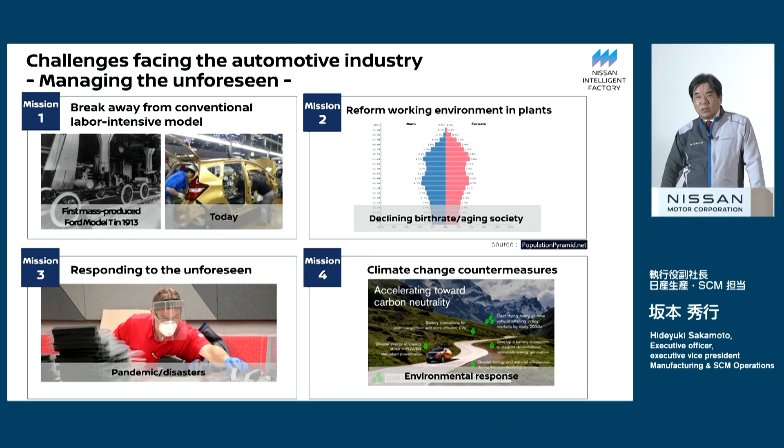Next page, please. We need to build our car production scheme for the next generation, which is adapted to the future: electrification, vehicle intelligence, and connectivity.

Building cars is growing more complex and advanced. We are writing a lot of software all at the same time, doing calibration of different sensors and self-diagnosis, fail-safe systems. These are the assurances that we are doing. So car building is becoming even more complex and challenging.

If you look at battery, big battery with long autonomy and standard battery, and vehicle intelligence, and hands-off sophisticated autonomous driving technologies or standard driver assist technology like ADAS, there are different combinations of variations which are required to build cars.

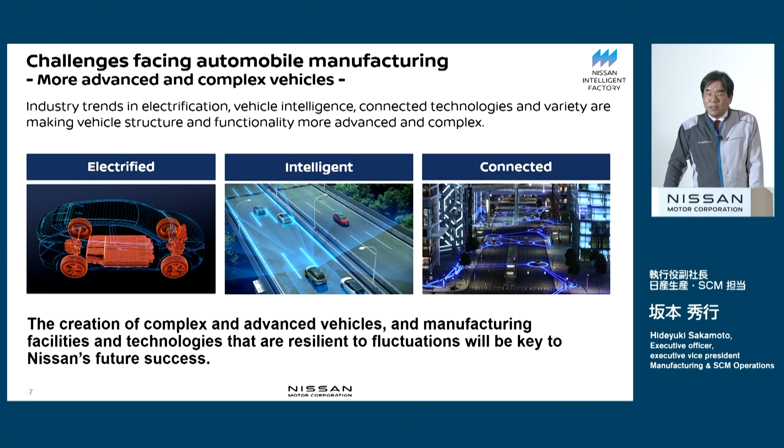So in order to build more advanced and complex vehicles, we need to make the production scheme and production engineering more flexible. And this will be the key success factor for Nissan in the future.

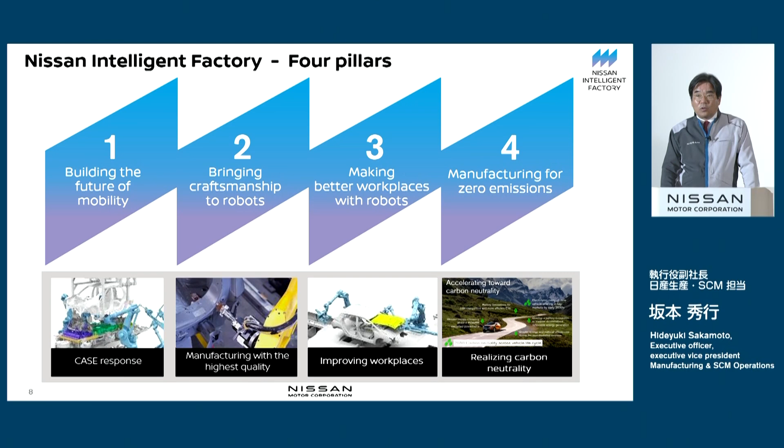That is why we have been creating this Nissan Intelligent Factory. These are the four pillars. Today, I will show you around the shop floor to provide you with the details. Next page, please.

In the introduction, carbon neutrality initiatives, what I would like to touch upon, which I had less opportunities to talk about in the past. And then we'll talk about the technological elements of Nissan Intelligent Factory, and Kikuchi-san will talk about the overview of the plant itself. Next page, please.

Carbon neutrality. Next page, please. Well, this is self-explanatory. Around the world, we are seeing global trends related to climate change. Many agreements and declarations are made. Japanese government too declared to hit carbon neutrality by 2050.

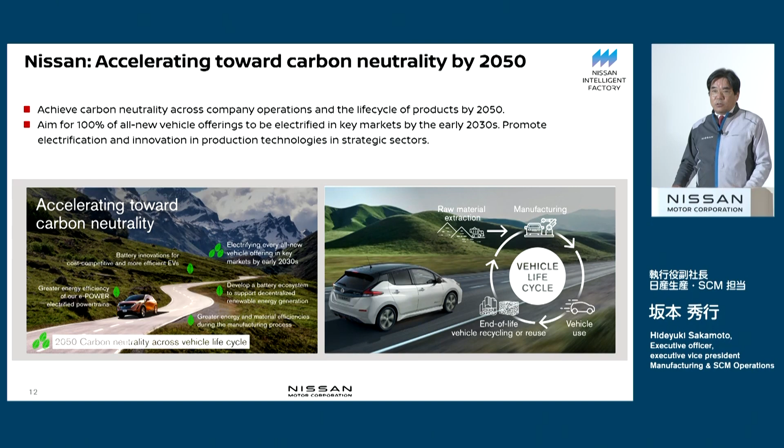And a lot of countermeasures are taken towards the goal. And we, Nissan Motor, declared to achieve carbon neutrality across company operations and lifecycle of products by 2050, and electrify 100% of all new vehicle offerings in early 2030s in key markets, and promote electrification innovation in production technologies to attain carbon neutrality even in the process of car building.

Having said that, carbon neutrality initiatives is nothing new for us. We have been working on the Nissan Green Program to reduce CO2 emissions ahead of many people.

In this Nissan Green Program in 2010, more than 10 years ago, with the first generation mass-produced Nissan Leaf EV, the main market in the main category or main segment of the market, C segment hatchback mass-produced EV, was introduced and offered an EV that you can use every day. I was in charge of the engineering at the time as a division general manager.

Then we came up with e-Power. This is about providing electric driving to help penetrate electrification in the market. That was why we introduced e-Power.

And at the time, I was head of the engineering and was fully involved in the development of this piece of technology. In order to build these electrified vehicles, by minimizing the consumption of energy, we minimize the CO2 emission. That's what we have been doing. And going forward, we are going to promote innovations to do more on this front.

Nissan Green Program. This is about the CO2 emissions in manufacturing operations. How much have we reduced the CO2 emission? For long years, we have been working on this. This started from 2005 to 2019. In order to build one car, we reduced 30% of the CO2 emission. This is already a track record.

This is a result. And as of today, 70% of energy consumed is electricity, gas, fuel. Fuel is the light oil, and this accounts for 30%, which is 29% to be precise. And we are going to nullify this consumption at the end of the day, and that's the mission of the manufacturing team.

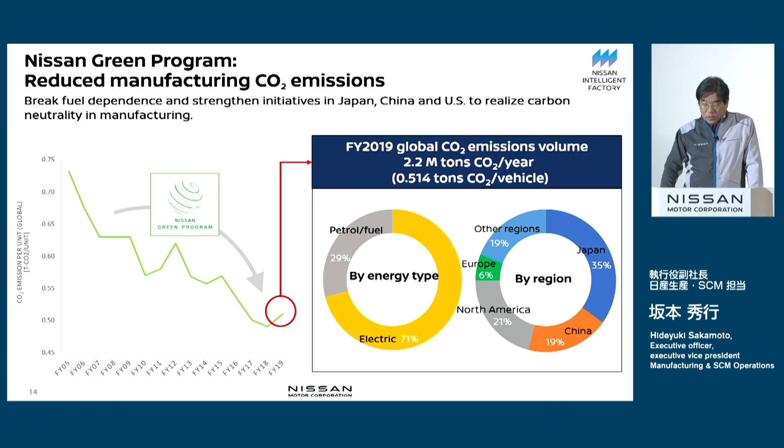Here you see how we are going to promote initiatives up till 2050, and this is a roadmap that we created. In 2019, as of today, which is approximately today, at the plant we have electricity at the plant. We use a compressor and using high pressure air, which is the blue line, and we provide high pressure air to the plant. And the gas, we use a boiler to evaporate it into steam. And this is how we operate the plant.

In 2030, what will happen?

We will largely reduce the energy consumption. And on top of this, within the campus, green energy, carbon neutral power generation, where we plan to use the fuel cell. We would like to generate power with fuel cell and use green energy, photovoltaic power generation, and windmills. We will combine the renewable energies and expand the scope of the trial.

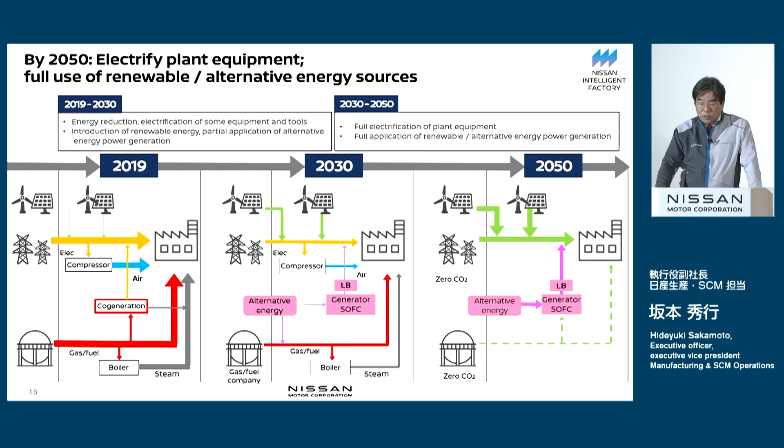Between 2030 and 2050, the basic production process or production equipment should be electrified, and the source of the energy will be shifted to renewable energy and clean energy power generation. That's our aim. Next page, please.

This is a specific example. It's pretty complex because the steel furnace, we do the casting. In this casting process, we use cokes in the furnace. We have to melt the steel and provide the nitrogen, carbon. So we need to electrify this furnace with the high frequency furnace. We need some technical development for this to happen, and the tools will be fully electrified.

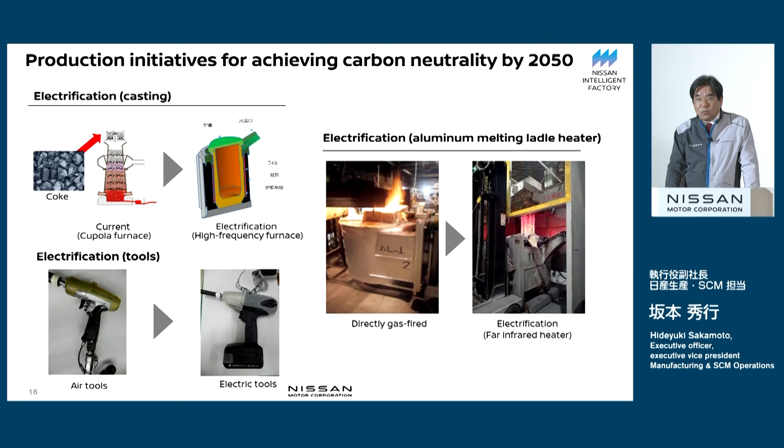Today we are driving the tools with air, and aluminum melting ladle heater will be electrified fully. These are the technological developments that are necessary. Earlier, I talked about how to electrify these equipment.

As you can see at the top, we shouldn't fully rely on external clean energy. So within the campus, we would like to generate the clean energy. To be specific, bioethanol will be used with the fuel cell battery SOFC, which is carbon neutral power generation. At Tochigi, we are going to do the trial, and at the end of the day, we will deploy it across the globe.

And as of today, in the UK Sunderland plant, we use wind power and solar power to generate a lot of electricity. And the other day, as we announced, a microgrid is created, and clean energy will be applied to a wide area.

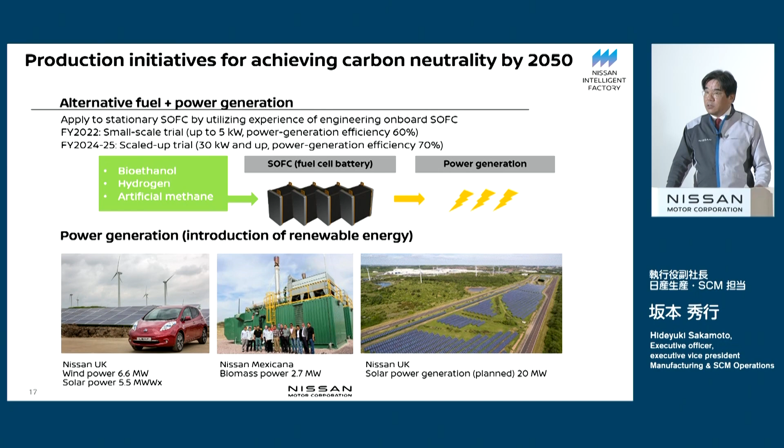This is a specific numerical objective of the concept. By 2030, 40% of the energy which is required to build cars will be reduced.

And in pink here, this is the carbon neutral power generation which is done within the campus, and this is the impact of the trial. This carbon neutral power generation and green energy procurement from the outside, and all the fully electrified energy will be used in 2050. And we will be fully carbon neutral. That's our intent.

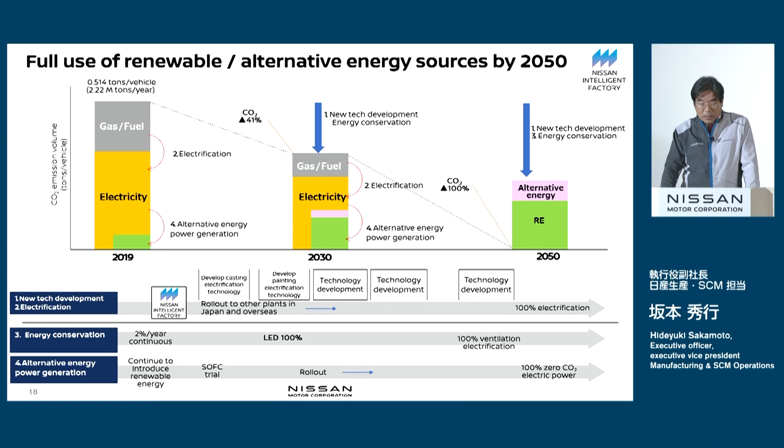Based on this detailed roadmap, R&D and production engineering teams are working to make it a reality. Moving on to the next one. That was all from me. I touched upon the carbon neutrality initiatives. Next is about the Nissan Intelligent Factory system components and the new technologies that are used, and CVP Hirata-san, in charge of this engineering, will be speaking. Thank you for your attention.

Good morning, ladies and gentlemen. I'm in charge of vehicle production engineering. My name is Hirata, nice to meet you. Let me take this opportunity to talk about how to build cars for the next generation with Nissan Intelligent Factory, and show you how the cars will change over time. Excuse me, let me take off my mask. And how the production line will be updated with new technologies.

I will specifically show you photos of the equipment used in this Nissan Intelligent Factory. On November 28th, 2019, Nissan Intelligent Factory Tochigi was used as a pilot, and we are going to deploy it globally, and that's what we announced. This Nissan Intelligent Factory in Tochigi will be producing the next generation battery EV, which is the Nissan Ariya.

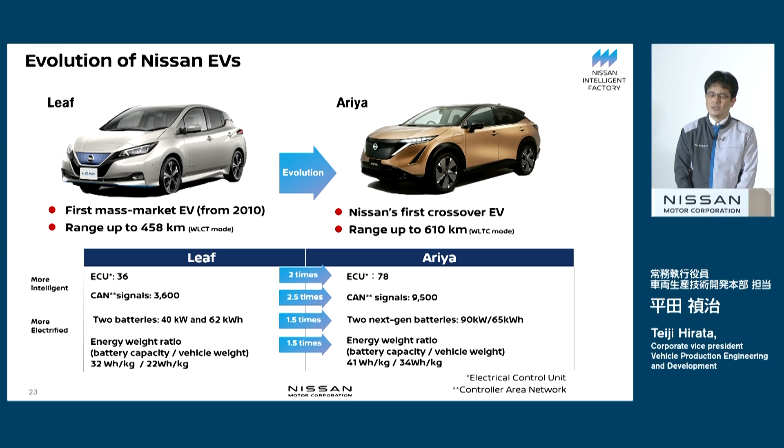The number of ECUs, electrical control units, is double that of the first generation Nissan Leaf, and the number of signals is 2.5 times. Two types of batteries have an output, and the energy weight ratio is 1.5 times, so it's largely updated from the Nissan Leaf.

Now let me talk about the 4 pillars of Nissan Intelligent Factory from 3 perspectives, providing specific examples of technology. One is Nissan's DNA in the all-new Ariya.

This is Nissan's DNA in the all-new Ariya. We newly developed a platform for EV, and thanks to this platform, we have outstanding quietness and a lounge-like interior, stylish design with a low center of gravity, and high visibility, which are very functional. Four types of powertrain, a wide color variation, and a highly intelligent electric control unit are representative examples of Nissan's DNA in Ariya. Now, in order to make this a reality, what kind of production technology did we use?

One is SUMO, the simultaneous underfloor mounting operation. With one piece of equipment, we can build multiple powertrain components in a batch, mounted from a single pallet. Today we have several processes with labor-intensive work, as you can see, where operators have to work in a hard position. We fully automate this universal mounting in a single process.

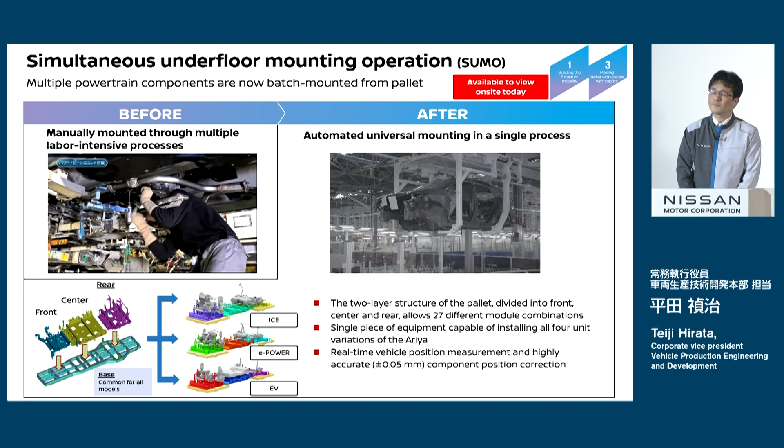The real-time vehicle position measurement enables highly accurate component position correction. This big and heavy powertrain unit is mounted in a single process, and we call it SUMO, simultaneous underfloor mounting operation.

Next is the automated tightening and alignment of suspension links. Here again, it used to consist of several processes with manual operation, which had a high workload, and was complex, requiring high skills. But here again, we introduce a single process with automated alignment adjustment. High load work requiring high torque tightening has been fully automated. Adjustment by robot with an accuracy of 0.1 degree ensures alignment that exceeds Takumi Master Craftsman precision.

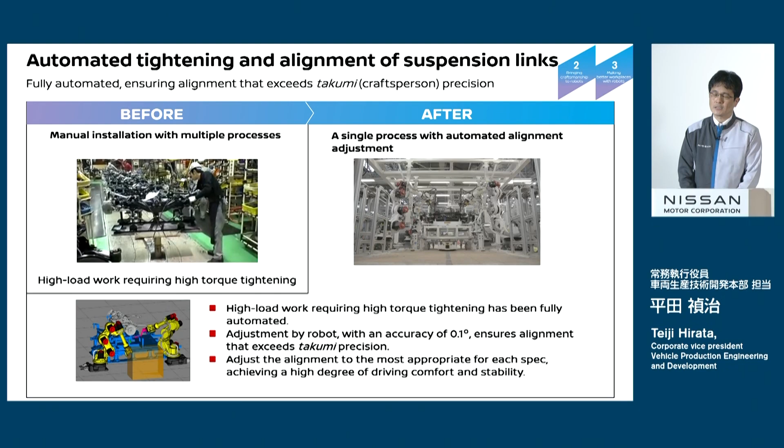As a result, driving comfort and stability are ensured on the EVs that we produce.

Next is automation of headliner installation. The headliner is the component on the ceiling of the car. In the past, operators had to come into the cabin to install the headliner, so it was very hard to do this. With the vehicle intelligence and connectivity devices added, the weight increased by 4 kilograms from the traditional car.

This installation is fully automated by robots. This component is not tightened with bolts; instead we insert a clip. Today, operators have to check that clips are inserted fully using their fingers to feel it, but we actually added a sensor on the robot so that on a real-time basis we can monitor the status, and once the clip is fully inserted, the work is complete.

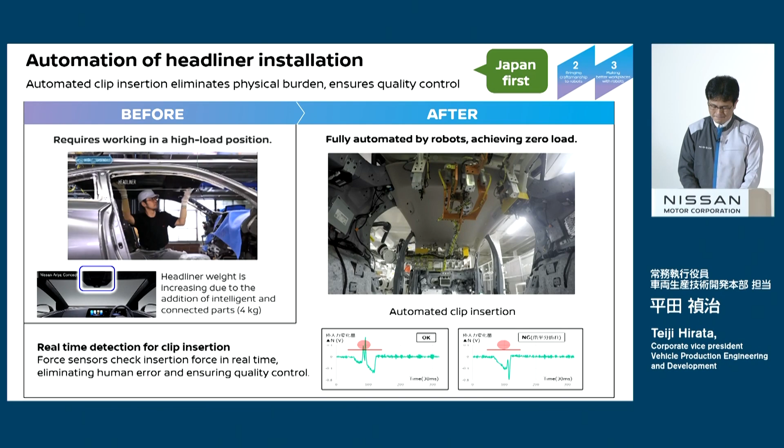Next is the automated cockpit module installation. Here again, we used to have 2 Takumi operators controlling the variations and left-right differences in this installation process. In the traditional process, we reproduce these high skills of Takumi master craftsmanship in robots. A high-speed vision system precisely measures dimensions, calculates the optimal center point in real time, and assembles the cockpit module for a well-proportioned and seamless cockpit.

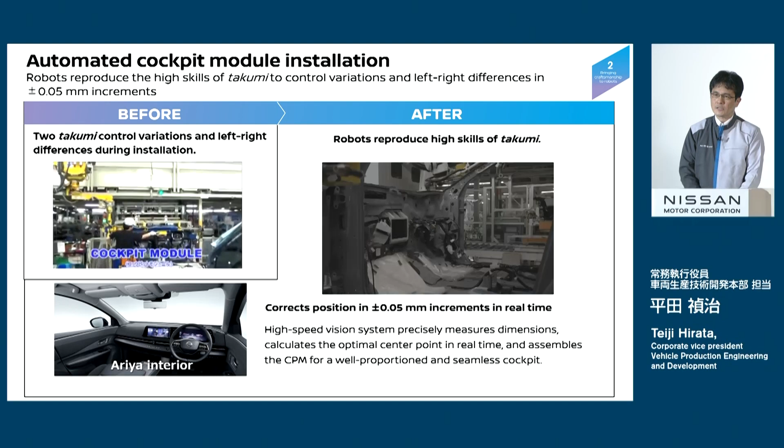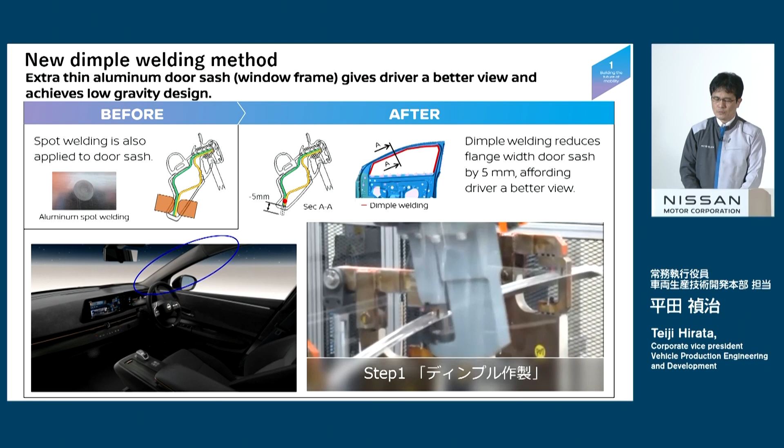Next is the new dimple welding method. The all-new Ariya uses an aluminum-made door. In the traditional aluminum door, the door sash requires spot welding like a steel door. However, the area of the electrode should be added on the panel to make this happen.

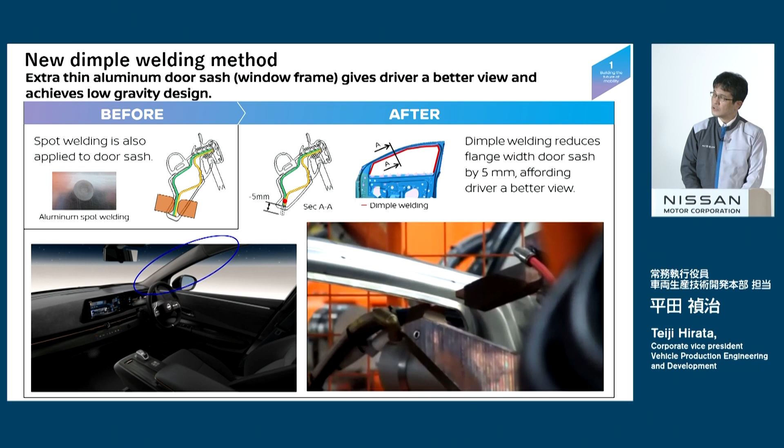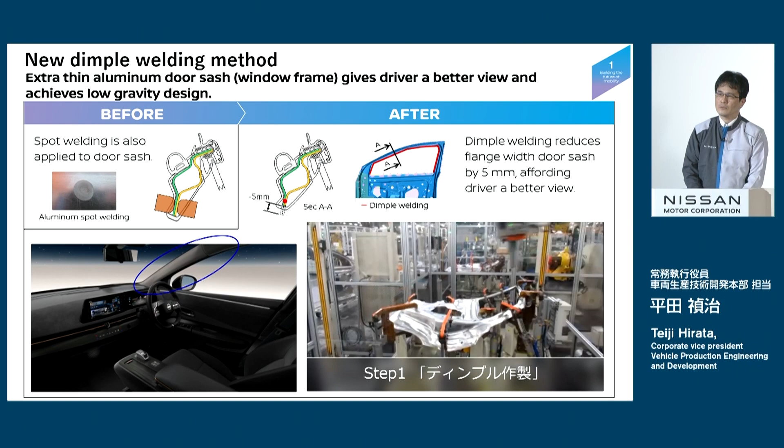But by applying this new dimple, which is a thin stamped dimple for the electrodes, we can make the electrode size smaller. As a result, we can reduce the front pillar width by 5 millimeters and increase visibility for the driver.

Next is electrical systems responding to increasing vehicle intelligence. As Sakamoto-san mentioned earlier, depending on the specifications of the cars, we write the software at the plant for the ECU. The number of units increased largely from the traditional car in the all-new Ariya, and the volume of data to be written is much larger than in the traditional car.

To respond to this, we introduced a communication speed that is 20 times faster. Today we do the communication with a wired system, but now we are applying a wireless device instead.

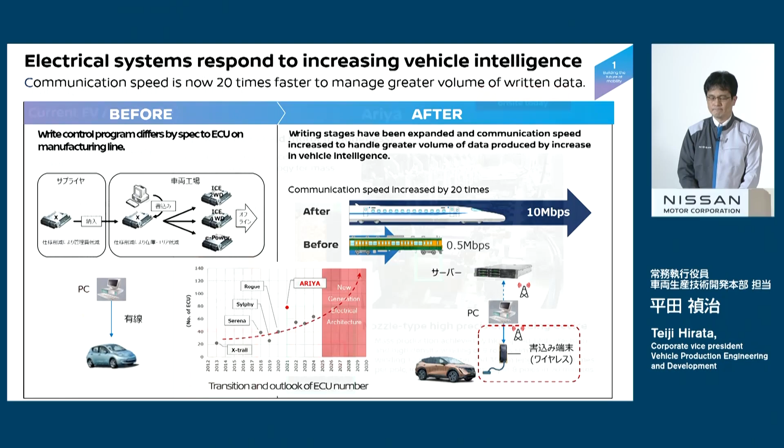Next is the core of EV, which is the motor production process. In the traditional EV and e-power motor, we use rare earth materials, a permanent magnet inserted in the rotor. But with the all-new Ariya, this is the first mass production vehicle where we use an 8-pole wound field synchronous motor.

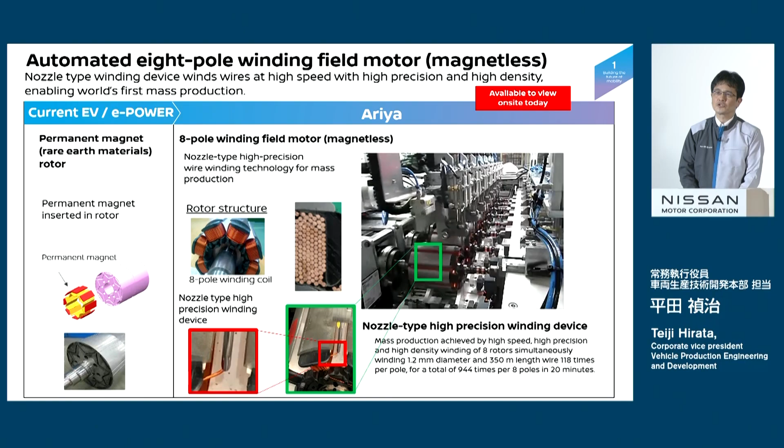To mass produce this wound field motor, high speed, high precision, and high density winding technology is required. Like a needle for injection, there is a 1.2 millimeter, 350 meter coil. It is wound 118 times per pole, for a total of 944 times across 8 poles, in 20 minutes. That's the equipment we introduced.

Next is automated paint inspection. Today, in the paint shop, we detect foreign objects on the surface with human eyes. But by using image processing equipment, in addition to the foreign objects we identify, we also identify 6 other faults which were unseen by the human eye.

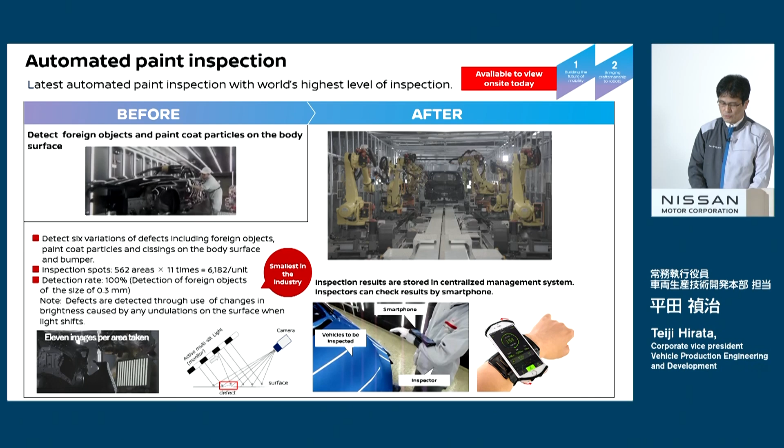As you can see on the bottom left, an LED light slit is reflected on the surface of the vehicle, and by shifting this light, we see the undulations of the light and differences in brightness. So we can see the undulations or unevenness on the surface to identify faults unseen by the human eye. Compared with the traditional scheme, we can detect foreign objects as small as 0.3 millimeters, which is the most precise in the industry.

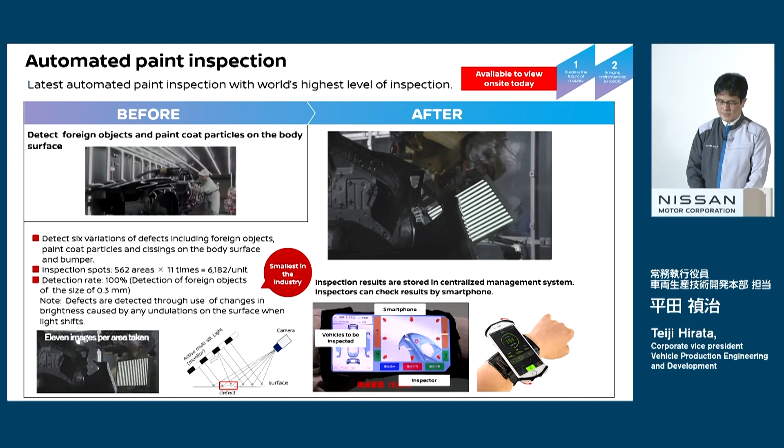The findings of the inspection are stored at the centralized control center, and operators can find these faults using a wearable device where they can view this data.

Next is the integrated automated inspection system. Just like the paint shop today, we rely on human beings to assure quality, and operators need to keep concentration, so we rotate them in different positions to help them stay focused.

Just like the paint shop, we introduced the same image processing technology to inspect complex specifications and detect minute flaws. For Europe, North America, and Japan, there are differences in specifications depending on the destination, so 56 items are inspected in full automation.

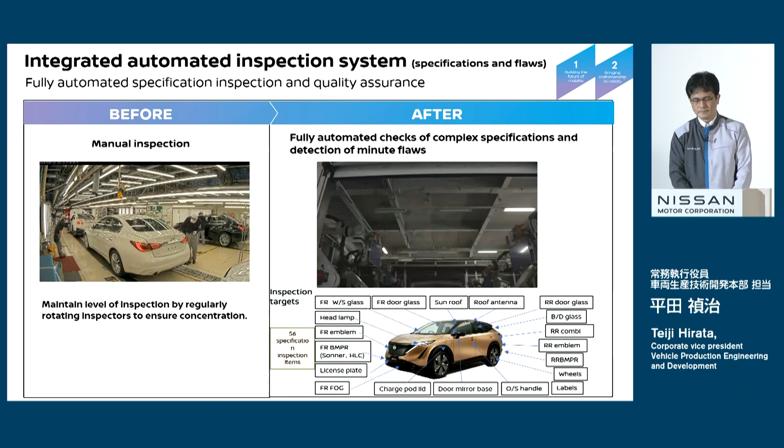Next is about our initiatives and contribution to carbon neutrality, starting with the world's first integrated painting and baking of bodies and bumpers. Traditionally, we baked and painted the bumper and body separately because they use different materials and require different temperatures.

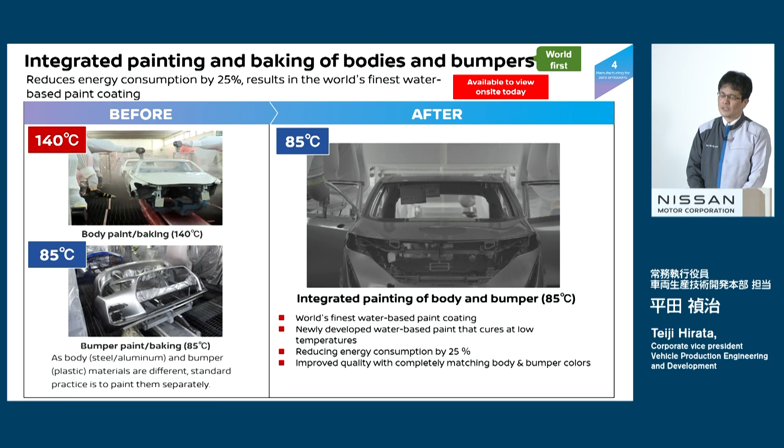We jointly developed the world's finest water-based paint coating, which can cure at low temperature. As a result, we can paint and bake the bodies and bumpers at the same time. We used to bake the body at 140 degrees Celsius, but now we can bake it at 85 degrees Celsius, like the bumper. As a result, with this world's finest water-based paint coating, we reduce energy consumption by 25%, a big contribution to energy saving. And because we paint and bake the bodies and bumpers together, we improve quality with better color matching.

Next is the dry paint booth. Traditionally, we extracted the paint paste, called paint mist or paint waste, by using water to collect it. This increased the humidity in the paint booth, so we were unable to efficiently circulate the air within the booth, and we had to discard this collected paint waste.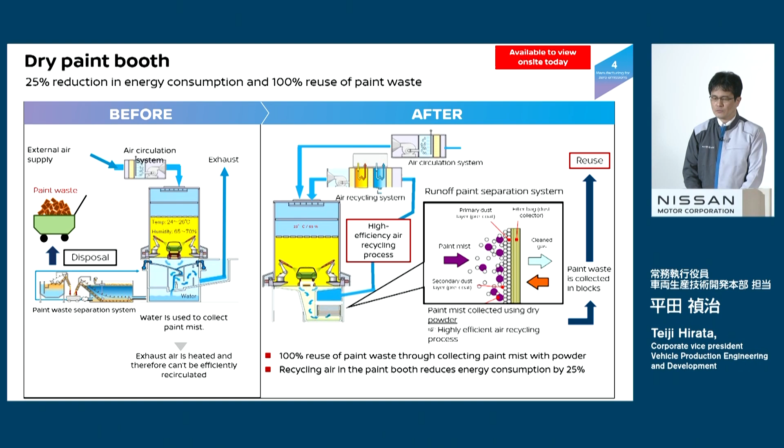By using dry powder, we collect the paint mist without increasing the humidity in the paint booth, so we can recycle the air efficiently. This paint waste is then put into a block, and we are trying to reuse it eventually.

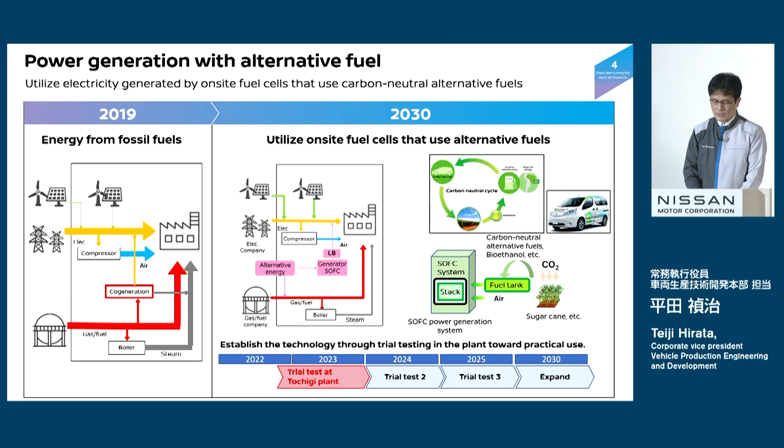Power generation with alternative fuel was already explained by Sakamoto-san. We are utilizing electricity generated by on-site fuel cells. From the latter half of 2022, we will conduct field tests of this fuel cell, and in 2030 we would like to fully apply it. To this end, we are developing the technology.

Next is about the digitalization of manufacturing.

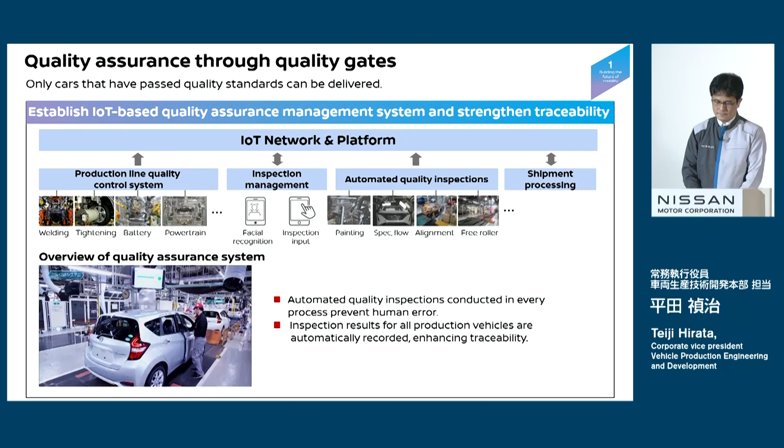Starting with quality assurance by establishing quality gates, automatic inspection in the paint booth. Besides this, we have quality assurance systems in other processes. We use the same network and the same platform to centralize control so that we can automatically take record of the inspection and ensure traceability, or increase the traceability.

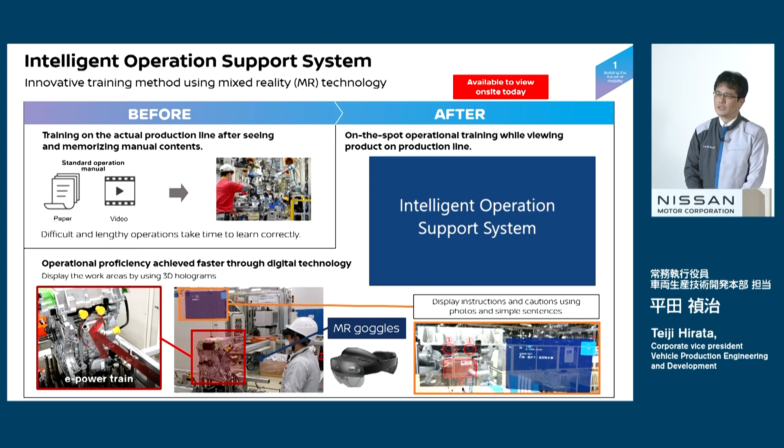Next is the intelligent operations support system. By using MR technology, we provide good training to the operators. We used to use textbooks and video and let them do on-the-job training, but when it comes to complex and long processes, it takes time to learn the skills. Now we are using MR goggles, and we apply a hologram. By using text and manuals, we provide caution points and what to do. So by being there at the line operation, we can develop and train the operators. As a result, we can largely reduce the lead time to train skilled workers.

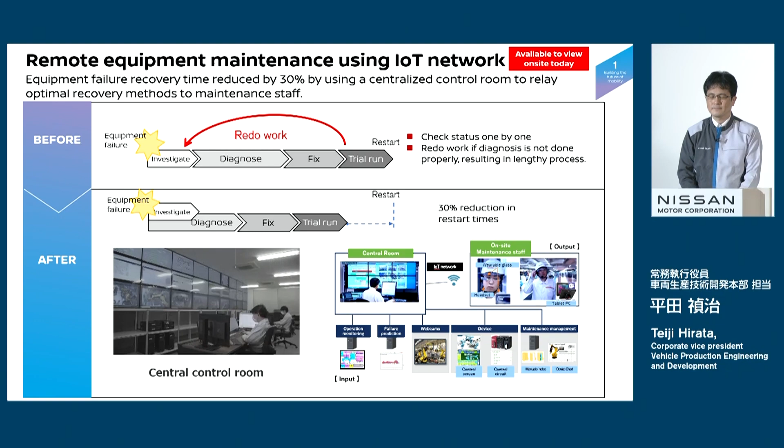Next is remote equipment maintenance using IoT network. The data and materials to fix the equipment are secured in the central control center, where skilled maintenance workers are stationed. These veteran experienced experts are connected to the operators in the line operation through a network. So when the equipment breaks down, this expert provides hints and the best way to fix it, so that we can reduce the lead time by which we restore the equipment.

And the last page. This is how, in addition to shorter recovery time, we are applying predictive and preventive equipment maintenance before the failure happens. By applying condition-based maintenance diagnostic technology, we apply logic and thresholds automatically and prevent failure. Thanks to IoT, we are monitoring the equipment at all times, and by using AI, we identify signs of faults or failure and minimize the production loss.

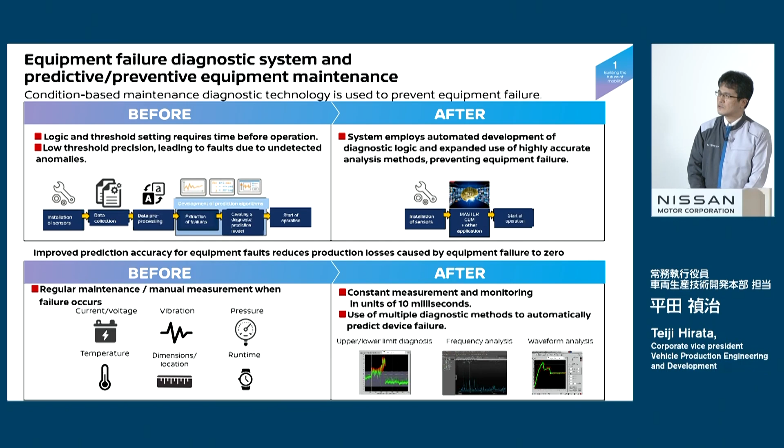These are many examples of the technology, and some of them will be shown to you during the plant tour later.

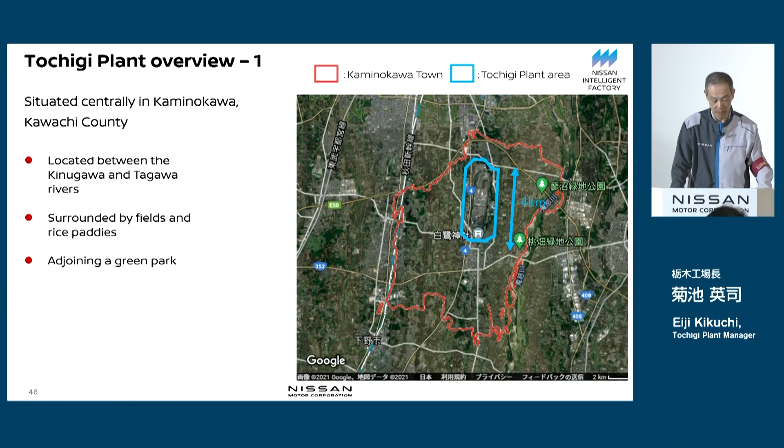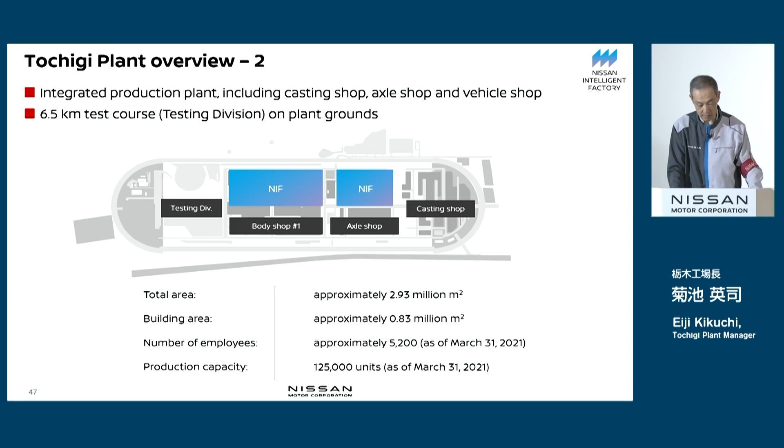Next page, please. As we run our operation, we value coexistence with the local communities. Around this plant, there are a lot of greeneries and a lot of biodiversity, and we are protecting the ecosystems around our campus. Especially, we are putting a lot of effort into quality of water, controlling the quality of water.

In Nissan Intelligent Factory, as Hirata-san mentioned earlier, the new paint shop does not require water — in other words, there's no wastewater. Other industrial waste, which may be emitted from the rest of the processes, is cleaned before it goes out, and we are monitoring this waste 24 hours around the clock. By using this processed water, we have a river created within this campus.

This fiscal year, on the 1st of April, my first job was to put fireflies in this river. This summer, these fireflies grew up and they were illuminating at night. Unfortunately, today you cannot see it, but this is one of the initiatives to enhance the quality of water, and this is one of our top priorities.